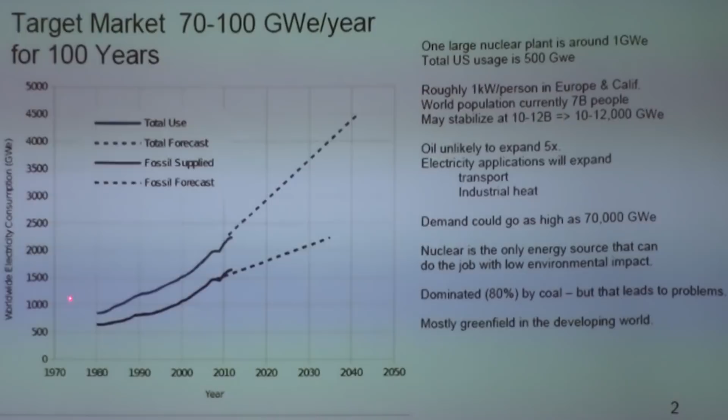Here, this is gigawatts electric. One large nuclear power plant is roughly a unit of 1, so this is roughly equivalent to how many large nuclear power plants do we need? In Europe and the US, we use about 1 kilowatt per person. In Europe and California, US is a bit higher as a whole. With reasonable efficiency gains, we should be thinking along the lines of 1 kilowatt per person.

Our current population is 7 billion. It's probably going to grow to the neighborhood of 10 billion before economies grow big enough that population stabilizes. So we're looking at a market of about 10,000 gigawatts electric.

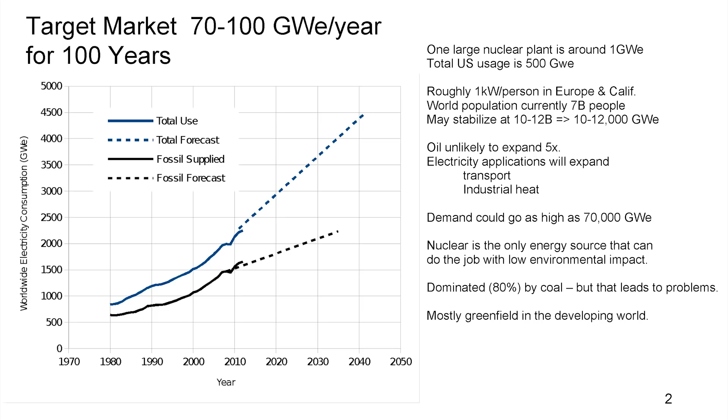But it could be larger because while we may not be at peak oil, we keep looking harder and keep finding more, but I don't think anybody honestly expects we're going to find 5 times as much oil as we have. So transport is going to shift, likely towards electricity. That's going to drive up our demand for total generation needed. Similarly with industrial heat. So there's a lot of reasons to suspect that 10,000 gigawatts is still a pretty low-ball estimate, and we might be looking at maybe as high as 70,000 gigawatts electric.

This is a huge market, the size of the whole oil industry today. If you look around at what could possibly supply this kind of energy, nuclear is the answer. The others simply can't meet that demand. But if we don't change the price of nuclear, we're going to be dominated by coal, and you're going to see 10 times as much coal as we have today. That's what's going to happen unless we can create a nuclear option that's cheaper.

The good news is that most of this nuclear is going into greenfield deployments—to people in the world who don't have electricity yet. So we've got a level playing field of brand new coal versus brand new nuclear. That's a lot easier battle to win than telling an existing coal plant to shut down and replacing it with a nuclear plant. That's a hard economic argument to win.

To successfully compete against coal, we need something that can scale up to very high volume, on the order of 100 gigawatts per year installation. Not 2 or 3, but around 100 gigawatts per year, or you're not seriously competing with coal.

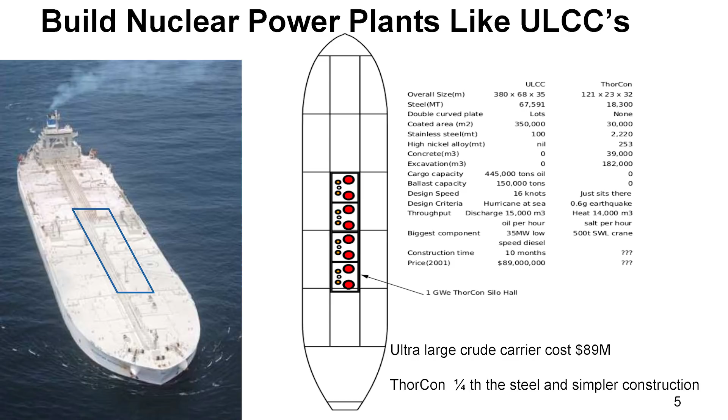So to go to more detail on the volume production end, this picture is of an ultra-large crude carrier, one of the world's largest ships. It was actually designed and built by the founder of our company. This blue box here is a 1 gigawatt power plant.

Drawn so that you can see it head on, this is a 1 gigawatt nuclear island of a power plant, not the turbines and generators and cooling towers, just the nuclear island. And it's small compared to the boat, like 1/4 of the steel. Similarly for virtually all the other numbers here, which are too much to go through, but it's simpler to build and 1/4 of the steel.

This boat cost $90 million. So if I can build a 1 gigawatt power plant for anything remotely resembling how much it cost to build that boat, that ship, then we're doing very much better than with current technology.

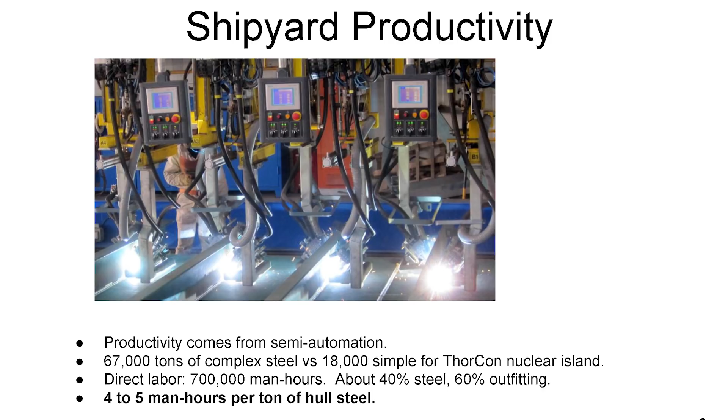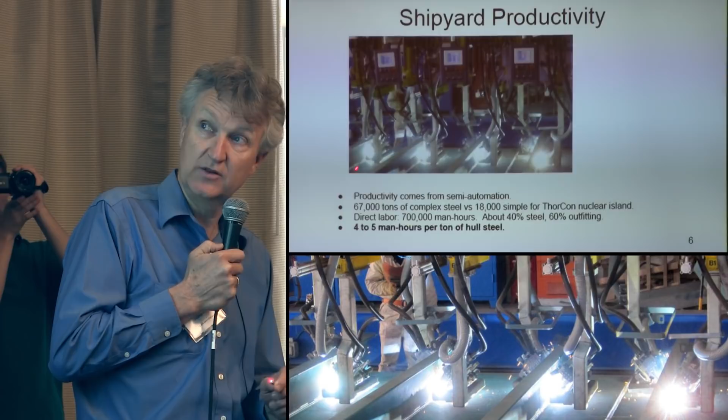The reason it costs so little for that boat compared to how big it is, is that they have shipyards that run things in production. This is for a double-hulled ship. You've got a plate of steel on the bottom, ribs going across, robot welders welding the ribs to the plate of steel, and one person running 5 or 6 different machines simultaneously. Then they flip it over and do the other side, making this double-hulled construction.

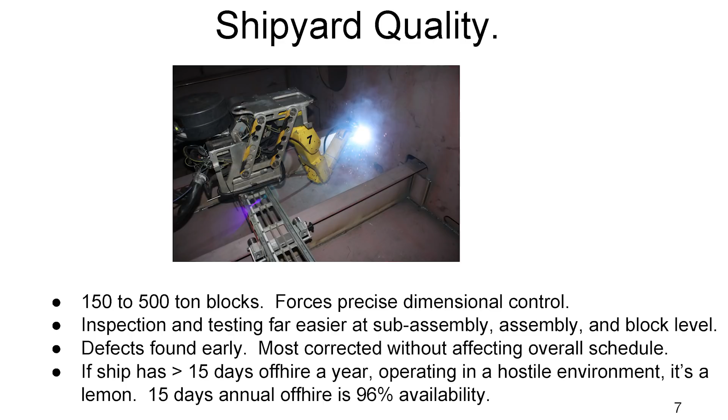We're building the power plants using the same basic technology, actually in the same yards. So our power plant is basically a boat dug into the ground with double-hull steel and concrete poured between the steel. One nice effect of that is you get very high quality control, a lot more uniformity, a lot tighter quality control.

We do these in blocks that are 150 to 500 tons, and the blocks have to align in the field very precisely, then they're welded together. We do the measurements, and they're quite accurate, having to compensate for how much 2-inch thick steel sags when it's set on end.

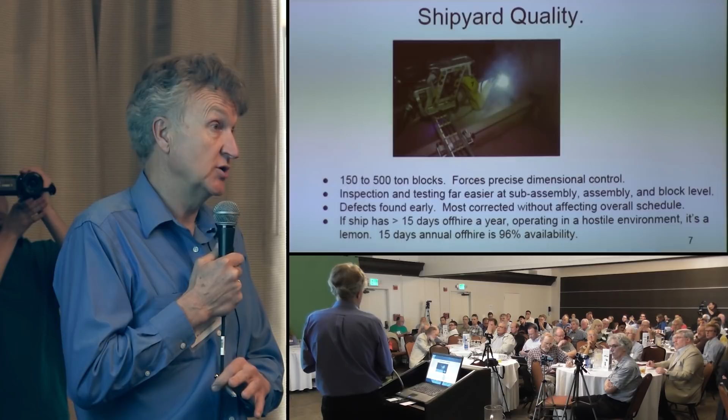We can do the full inspection on the production line, and if there are any defects, you can reject the block and do the modifications on the production line. You don't have to do this work in the field. So our goal is to get like 90% of the work done at the production line and leave only 10% for the field. A 1 gigawatt power plant is about 100 of these blocks.

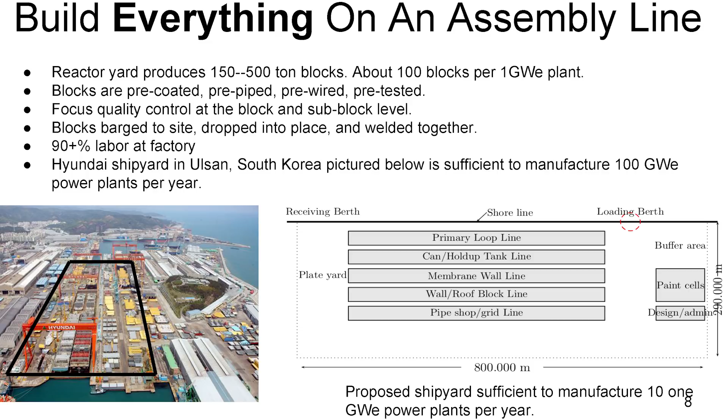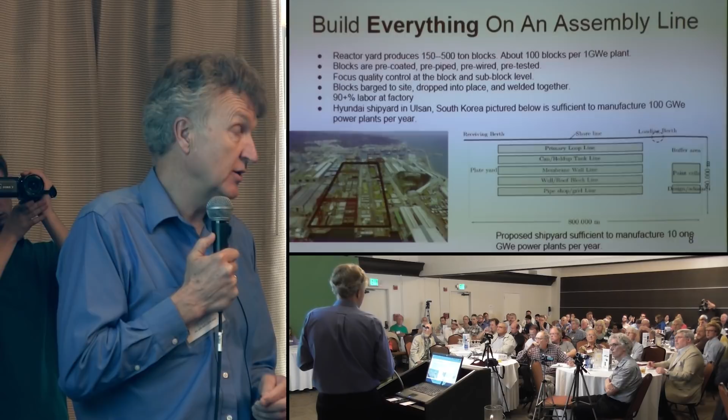They're pre-coated, pre-piped, pre-wired, everything finished in them, ready to basically plug like Lego blocks to the adjacent blocks. Once the blocks are all ready, in a normal ship they would be built in the dry dock at the shipyard. In our case, we're going to put them on a barge and carry them out to the nuclear power plant site.

This picture is of a shipyard in Korea, run by Hyundai, actually the world's largest shipyard. The highlighted area is what we would need to build a 10 gigawatt per year power plant factory. This gives you actual dimensions on it. If we took up this whole shipyard, we would be able to produce 100 gigawatts per year.

So the concept of being able to build power plants at 100 gigawatts per year is very, very much viable. And once we get away from the thick forgings of the reactor vessel that you have with light water reactors...

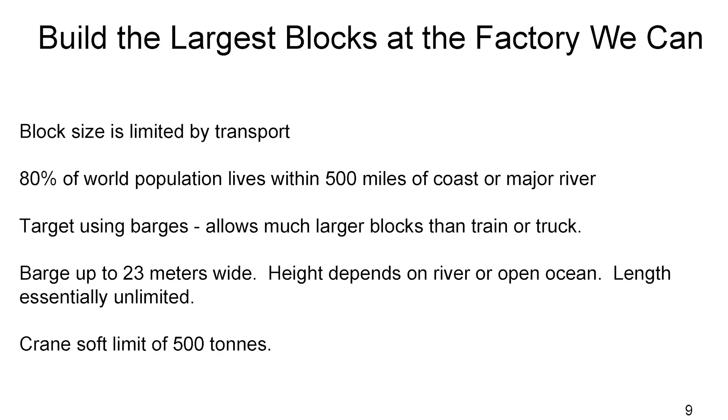The block size is limited by transport. We would love to build the whole power plant in one big block, but it gets to be a little awkward to carry around. What we notice is that about 80% of the world's population lives within 500 miles of a coast or a major river, so we're planning to use barges for transport, which makes it so we can transport these 500-ton blocks. They can be much larger than you can fit on a truck or a train.

That makes it so we can do more of the work at the factory, more of the inspections at the factory. The barges are up to 23 meters wide, which is set by a lot of the rivers and locks in the river systems.

500 tons is our current design limit, but that's set by crane sizes, and there are larger cranes, so we're going to be doing some economy trade-offs of whether we should go to larger blocks still or not.

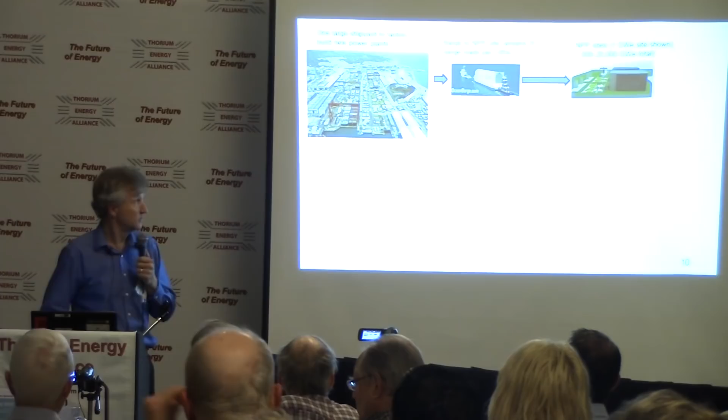So the concept is you have a factory that puts things onto a barge. It takes about 20 barge loads to deploy a 1 gigawatt power plant, so that's what this is.

Once you've done that, then every 4 years we exchange our cans, because we have a graphite moderated reactor, and so the graphite is going to get neutron damaged. We have to replace it.

We do that by having sealed cans that we put on a can ship, a specially designed ship, that will haul those back to a can recycling center, which basically looks like another shipyard that services about 50 gigawatts electric.

And we take the cans in, clean them, inspect them, make sure they're still good to go, ship them back out, or in some cases, like with the graphite, we take the old out and put the new in.

After we've been doing that for a decade or so, we're going to have some spent fuel, and that will go to a fuel recycling center.

We'll start out with just using simple fluorination and distillation to recover most of the salt. That'll let us recover the salt and the uranium and the thorium. It does not let us recover the transuranics.

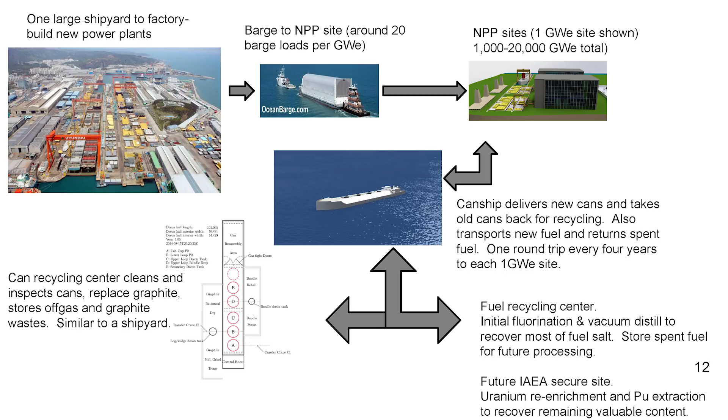In the future, we would anticipate making this a secure site and being able to do re-enrichment and transuranic extractions. Power plants are quite content to eat all of their own transuranics, so our waste flow as far as plutonium, curium and americium is set by how much leaks through your chemical extraction process.

We have to be safe. This is a 1 gigawatt power plant site. You see the can ship here.

This little red one is a can, that's a 250 megawatt electric reactor. We have a crane that moves along on rails, a gantry crane that picks it up and takes it over. These yellow hatches here are the doors to our reactor.

Our reactor is completely underground, and you access it directly from above. You take off the trap door and then you lower the reactor down into it.

These closed towers here are the decay heat cooling towers. So we have fully passive decay heat removal.

And then this is a standard turbine generator. We use standard steam cycle turbine generators until other people spend the money to invent the Brayton cycles. We have no objection to Brayton cycle, but we don't want to wait. I can buy the steam cycles today, and I want now.

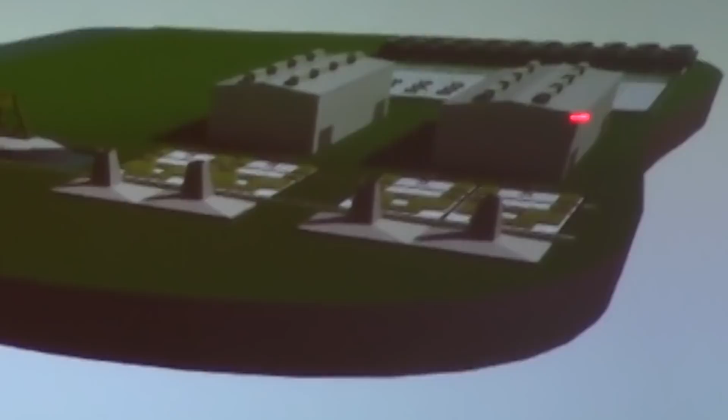Then behind that is a switch yard and forced draft cooling. But I'm sure we're going to end up having to support several different cooling styles depending on the site.

They make them larger, but they don't get any cheaper per megawatt, so we get better modularity by going about 600. They make them smaller, but they get more expensive. So we're sticking around the 600 megawatt.

We have 250 megawatt blocks, so it takes 2 of those to drive it, and these little red lines here are the steam lines that are going off to the turbine generator building. The nuclear island itself is 250 megawatts.

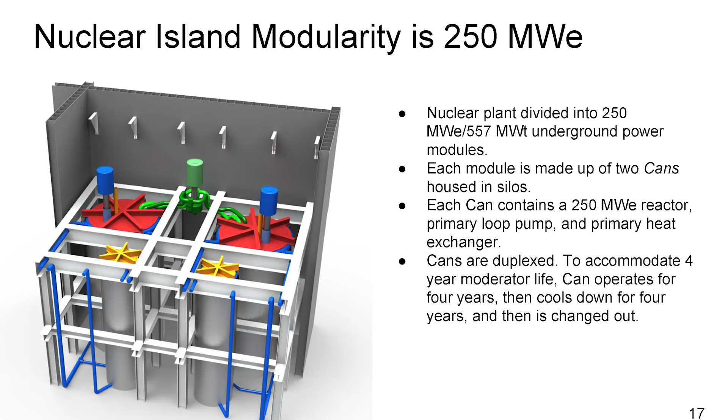We have 2 cans, so we're duplexed. One can is operating while the other can has spent fuel in it and is cooling down, letting things cool down before we transport it over the ocean. So what we're transporting is on the order of 4 years old.

Each can contains the primary loop pump, the primary heat exchanger, and the reactor vessel itself. So all of our radioactivity is really contained within the can.

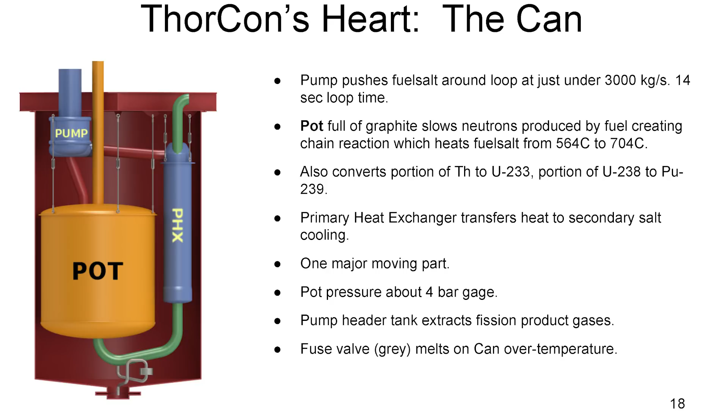We ship a sealed can out, we take a sealed can back. Inside the can, you've got the reactor vessel called the pot. We've got the pump and the primary heat exchanger, and those go around in a loop. You get secondary salt coming in and going out. And we have the fuse valve here at the bottom, and this will go off to a fuel dump tank, which we'll talk about in a minute.

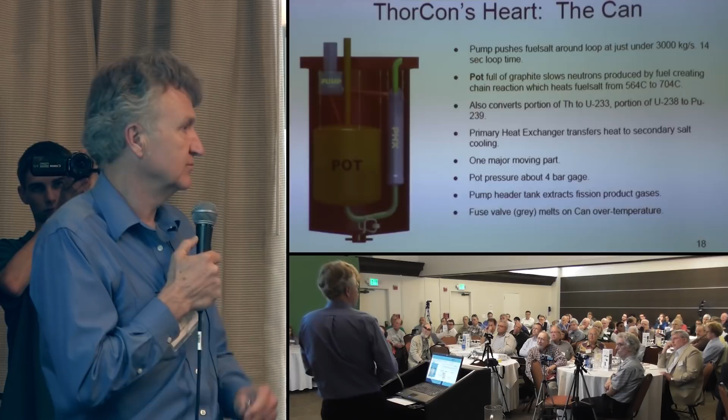Everything is hung from the ceiling of the can to accommodate thermal expansion. That turns out to be a reasonably challenging engineering problem—how do you deal with how things change shape as they go from room temperature up to 700 C? So we've done that by hanging everything from the roof and letting the cables adjust to let the parts move apart from each other and squeeze together with temperature.

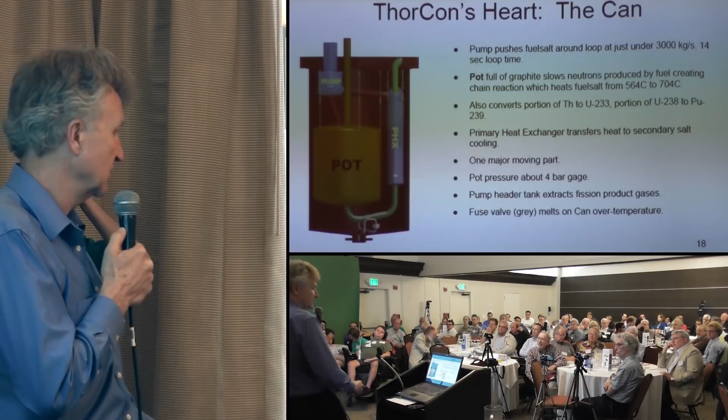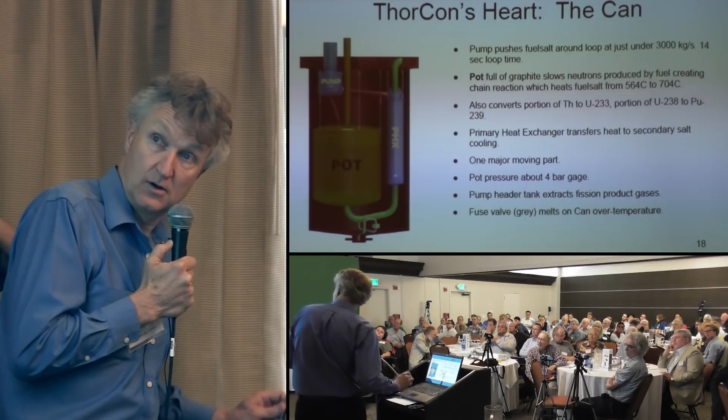The pump is moving about 1 cubic meter, about 3,000 kilograms per second, and it takes about 14 seconds to go around the loop. You only have one major moving part, the impeller for the pump, and the pressure is modest. The pot itself is around 4 atmospheres, and the highest pressure in the loop is 12 atmospheres. So we're dealing with very modest pressures here.

At the bottom, below the can, we have what we call a fuel dump tank—it's just the green part, a donut-shaped vessel that will hold all the fuel salt. Because it's donut-shaped, it's very poor for neutronics. Since we can move the fuel, we move it there, and it's in exactly the wrong shape for good neutronics. So the reactivity down there is very low. If gravity works and anything overheats, it will cause something to melt—preferably the fuse valve, but if that fails, a pipe will melt, and the fuel salt will fall down into this donut where it is not going to fission.

Guaranteed. No chance, no discussion about possible recriticality. That just isn't possible to happen.

I should say also that the fuse valve and the emergency drain here is something the operator can't prevent. If the Prime Minister calls and says, no, you're not allowed to open the valve, the operator just says, I can't stop it. There's no valve he can possibly fail to open, and no valve he can accidentally leave closed and cause trouble with, like we had with Three Mile Island. So the safety here is not operator dependent or Prime Minister dependent.

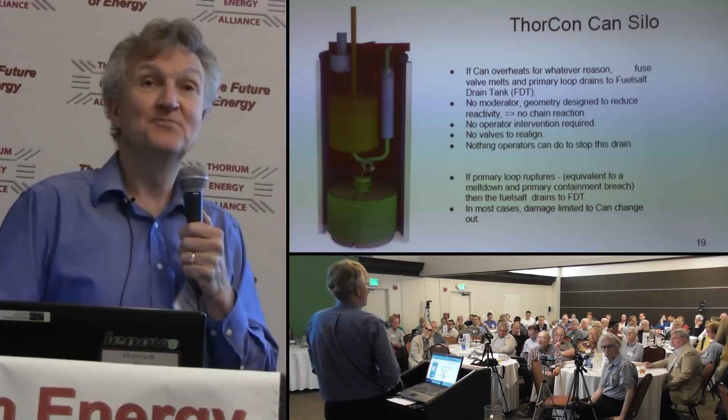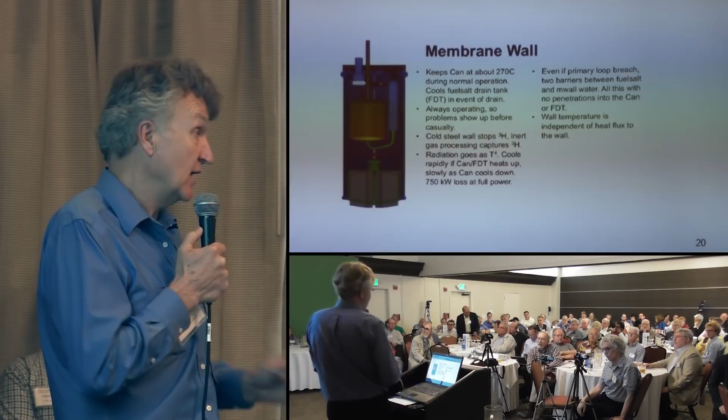Likewise, if you get down to the fuel dump tank, if heat is generated down here, it'll pump up from here. So the decay heat removal is there all the time, operating all the time. If something should happen—say an earthquake squeezed a pipe and blocked it—we will know because we see it in the flow during normal operation. We don't have to wait for a tsunami to hit to discover we have a problem. So we have it continuously tested, continuously running, and the operator has no valve, nothing he can do to stop it.

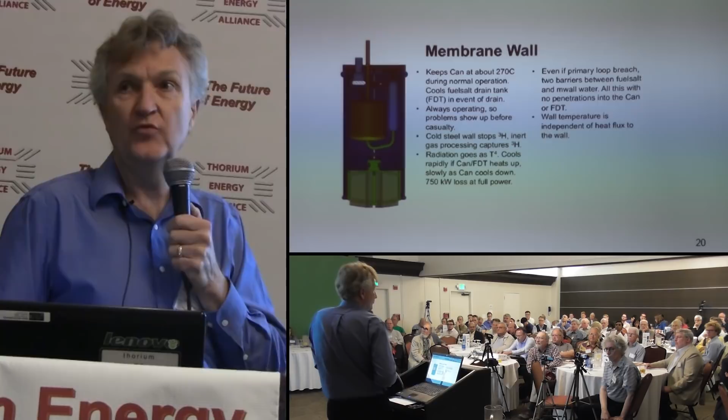It also doesn't penetrate any of the radioactivity area—this is done purely by radiation, no bayonets or anything probing down into the fuel dump tank. We've tested this in software up to 30 megawatts of decay heat power, and the peak decay heat we actually see is 5 megawatts, so we have a lot of margin on that.

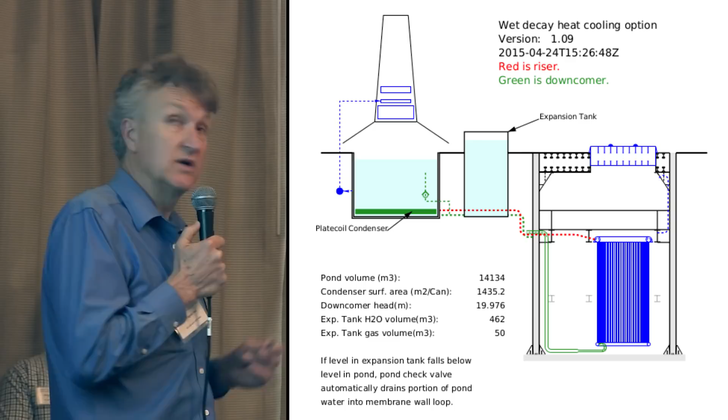Once we get the heat into the water of the membrane wall, we have to get it further away because there's only so much water there. So the hot water travels over to a pond. The pond evaporates and goes up to a steel cone above it, a chimney, which is air cooled, and the water condenses there and falls back down again. That should give us a nearly infinite supply of decay heat removal. If for some reason you're not allowed to put a chimney up, it's still 72 days worth. So we have plenty of decay heat removal, and since this is atmospheric pressure water, it's very easy to replenish if needed.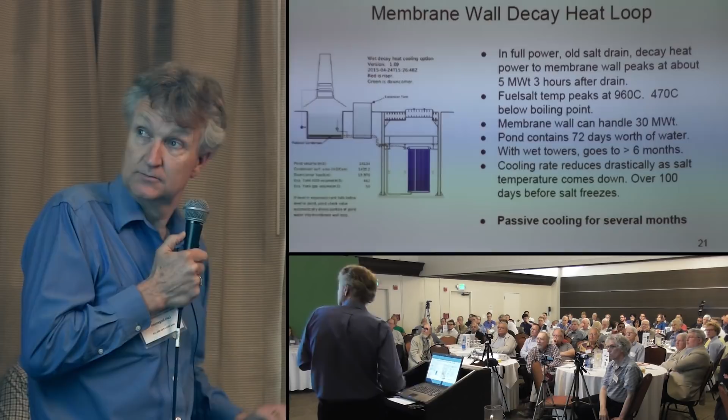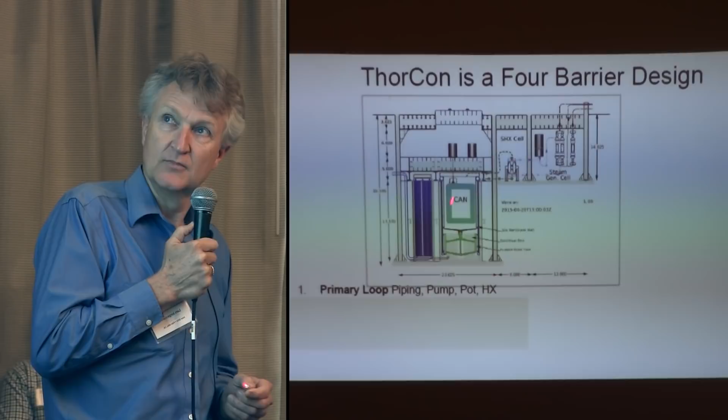Besides decay removal, we have multiple barriers to release of the radiation. The radiation is inside a primary loop, the pump, the pot, the pipe, so it's inside here. That is all inside of the can and the fuel drain tank, so that's the second barrier.

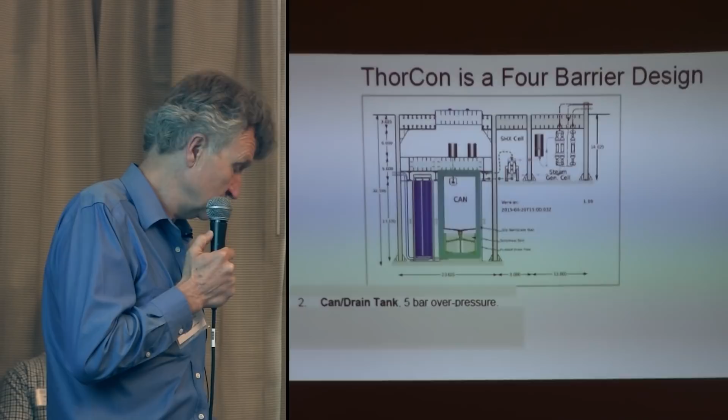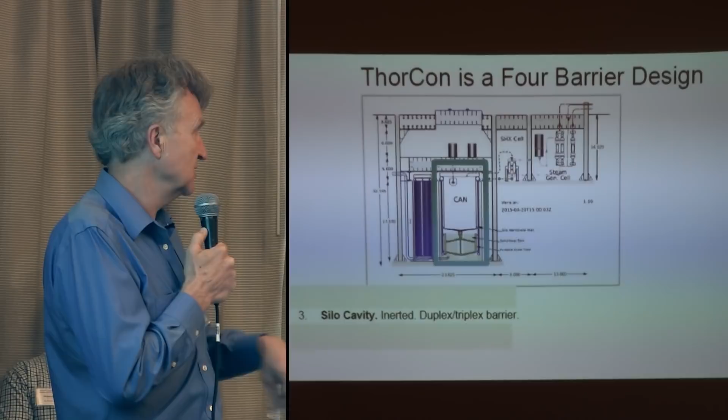The can and drain tank is in something we call a silo, which is a concrete structure, basically a concrete steel cylinder that's also gas tight. And then that whole thing is inside of what we call the silo hall, which includes the motors and the hatch to the outside world. So this is where you finally get to the outside world, and this is all ground underneath.

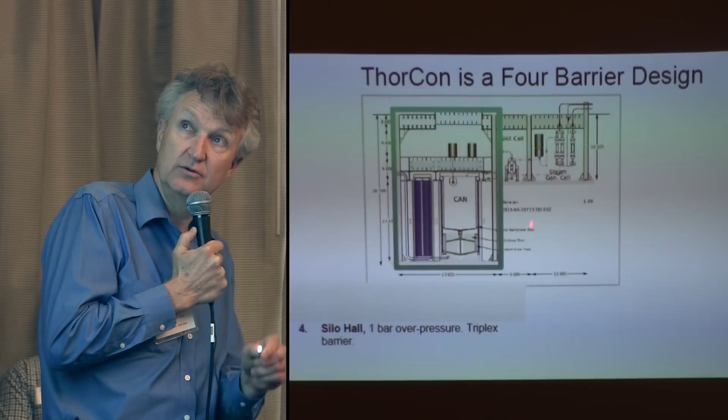So we have 4 barriers to getting any kind of radioactive release, and at least 1 barrier between adjacent modules. So if you did have one module that goes out, it's very unlikely to contaminate the adjacent modules.

We actually, in many ways, have a 5th barrier in that the fluoride salt itself is a very good barrier, in that the dangerous nuclides or elements would be your cesium, your strontium, and your iodine. The cesium and strontium form pretty tight fluorides that don't want to go anywhere. In fact, figuring out how to get the strontium out is a fair challenge. It doesn't even boil until like 2500 C or something ridiculous.

So even if somebody sent, say, a bunker buster missile in and went blasting through all of the barriers, you create a spill, it's a spilled salt that solidifies on the floor. It's not something that wants to go into the atmosphere in the first place.

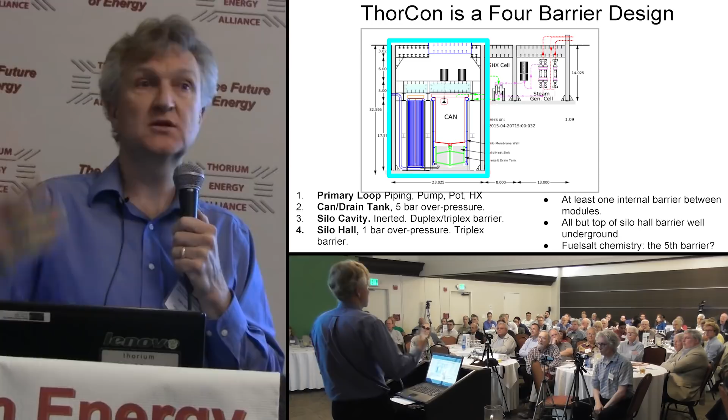Just a quick word on the neutronics, I'll keep this real short. The core is made up of logs. The logs are made up of planks, and all of that is graphite. If you're familiar with the Ebasco design, that was a spin-off from MSRE when they were looking at MSBR, it's based on that. We've made an accurate 3D model of the pot and run that both through MCNP and Serpent and get consistent results through them.

So we're pretty confident on that. We've actually extended the model to include a fair portion of the power plant beyond the reactor vessel itself, so we can see what about radiolysis of the membrane wall water and other questions like that. We're able to handle fairly flexibly what kind of fuel and salt in the same reactor.

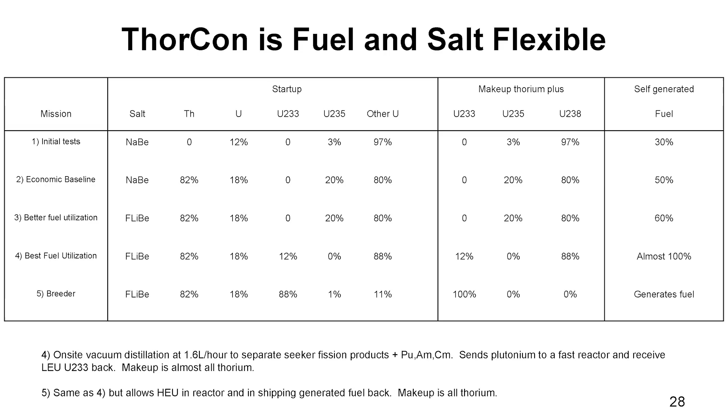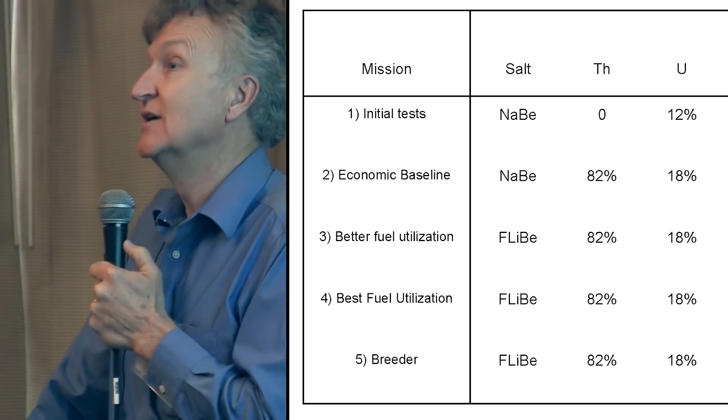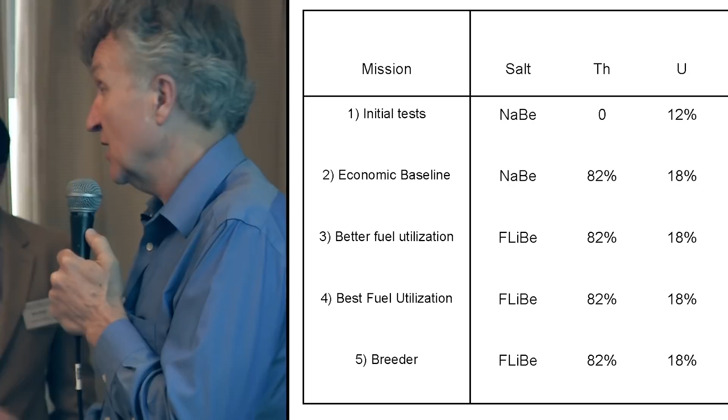We're currently planning on using NaBe, sodium fluoride, beryllium fluoride as our baseline salt because we can buy it now. FLiBe is a little harder to get by, and we don't want our schedule to be dependent on when we can buy FLiBe. So we make the economics work with NaBe. When FLiBe comes along, we can switch to it.

Likewise, what enrichment we can start with depends on time. So early on, we're thinking we might be stuck with 3% or 5% uranium, and then later on, we'll be able to switch up to 20% and get better efficiency, better economics. But it just changes the economics by less than a penny per kilowatt, so it's not a super critical thing.

I'm going to derail for a second and talk about should cost versus did cost. Should cost would be, if we set up a manufacturing line, how much does it take based on putting in the materials and the skills we have to put in, the labor we have to put in. Did cost is, and then what happened when you got in with all the regulations. So we're going to focus on what it should cost. The regulations are going to come in on a country by country basis, and it's going to preclude us from certain countries until they come to their senses.

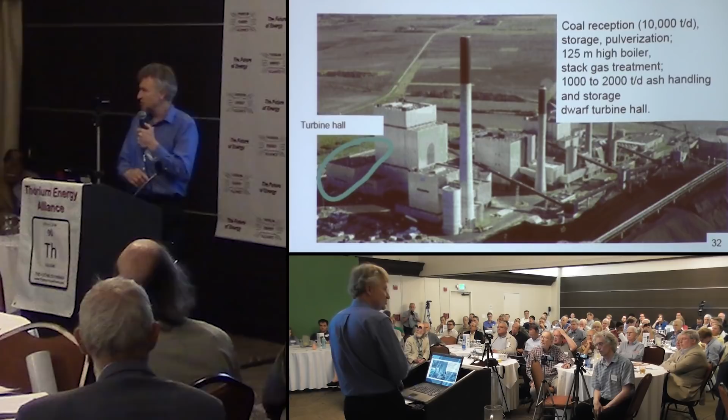And they've got the hard job. They've got the guys that are going to move 10,000 tons a day. They've got the guys that got 10 times as much building as we do. We should be able to beat them, and we can.

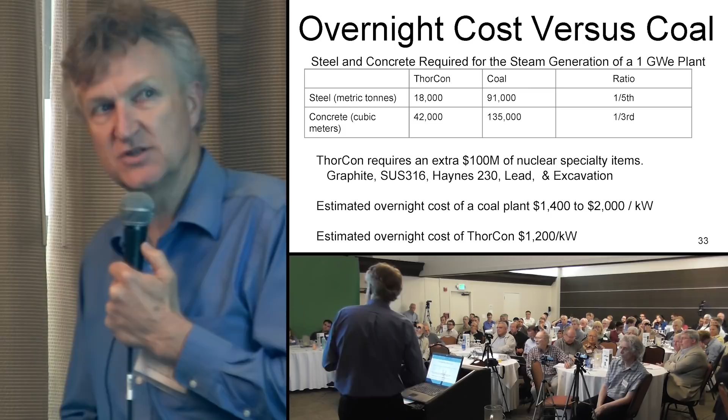So on steel, we got roughly 1/5 the amount of steel as a coal plant does. For concrete, we've got about 1/3 the concrete that the coal plant does. So our materials cost should definitely be significantly lower. We do have some exotic materials, so that adds up to about $100 million per gigawatt.

So if we get to the levelized costs, I can go through all the details here, but bottom line, talking about roughly 6 cents a kilowatt hour for coal and about 3 cents a kilowatt hour for ThorCon. It's roughly where we think we're at.

The other thing we think is important is if you're going to have 10,000 units deployed, inevitably some of them are going to break. We can't say why or where, but something's going to break someplace, sometime. We want to be sure that's not a significant event. So all the modules are replaceable, and you have hatches on top that let you come in, take the module out, and put a new one in.

That's quite different from existing light water power plants, where they have to deal with very large pressures and a large inventory of water that could turn to steam and has to be contained. Because then you have to cut through the concrete mausoleum to try to get in there and fix things, and that can be quite expensive and has actually ruined some power plants.

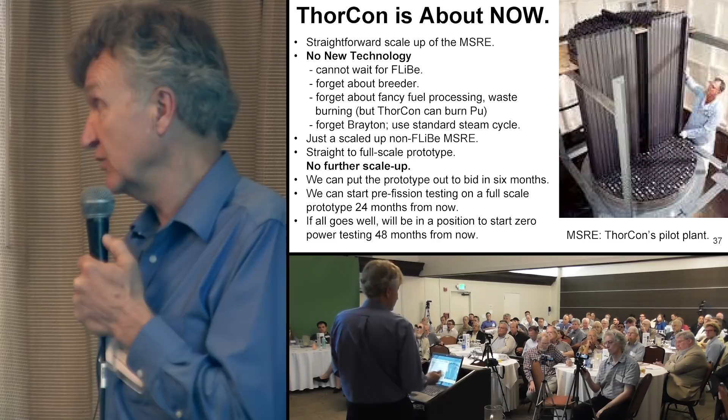Finally, it's about getting it ready now. So we started with MSRE, and we've made sacrifices in neutronics performance, and somewhat in economics, in order to keep the schedule short. We're not depending on when we can get lithium-7 — we're saying we can do just fine with NaBe. We're not depending on when we can process the plutonium, extract it, and recycle it — that'll wait for us. We have some spent fuel, we'll stick it in the corner, and when the process is ready, we can go back and clean it up. It's not going anywhere. We're not going with the Brayton cycle because it's not here now. We can go buy steam power plants and compete with coal now.

We do plan to build a full-scale prototype. Our prototype will be 250 megawatts electric. Once we've tested it and abused it, put it through all accident scenarios, we can tell people in the city: no danger is going to happen, because we've tested it. We've actually done it. We'll ruin a power plant in the process of that testing, but we'll be able to give people that reassurance, that safety.

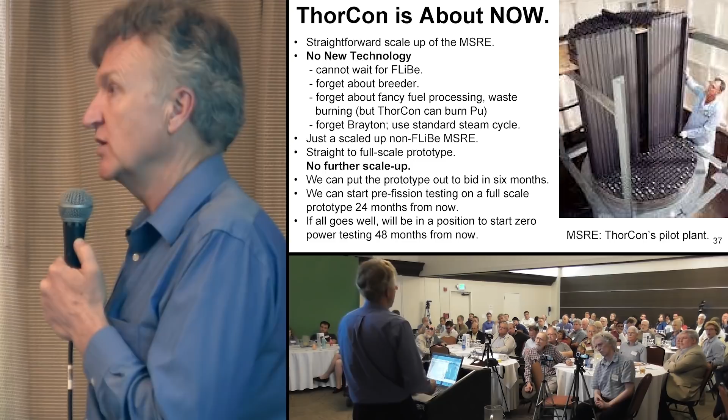We think we can get to pre-fission testing in about 2 years, and to fission testing in about 4 years, based on the speed of technology and how fast we can get the work done. Now, if the regulation system is slower than us, that will extend the period. In some countries we think we could just add 1 year to that schedule and work there. The other factor is finance, which I don't have answers for right now.

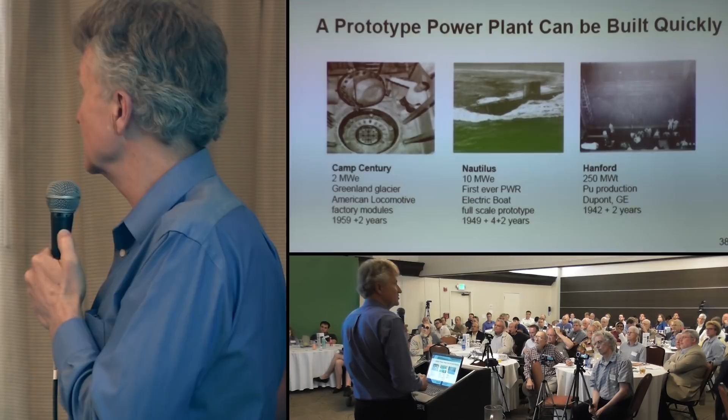That kind of schedule seems crazy to people used to the nuclear industry, but I'd point out that Camp Century was built in 2 years. The Nautilus was built in 6, and that was the very first one, with lots of extra challenges being a submarine. Hanford was built in 2 years. By those standards, ours is a rather lax schedule.

Your construction costs are $1 per watt, correct? Yes. What is a typical power plant right now? For nuclear power, about $8 a watt in the US, and $6 a watt in the UAE, something like that. 5 or 6 in China.

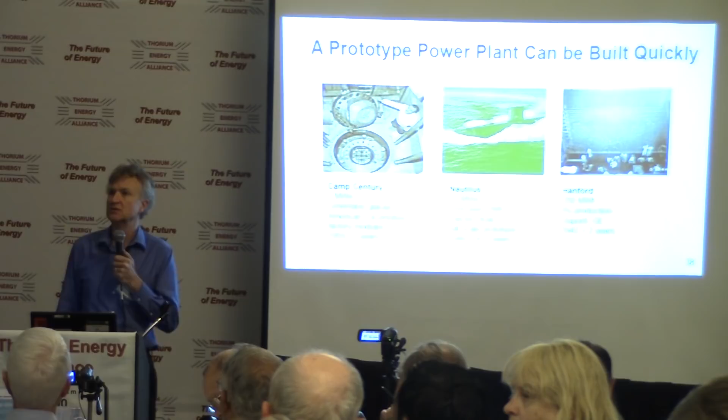With that $8 in the US, is that a lot to do with regulation — a very significant cost? A third of it is attributable to regulatory costs. So the question is, is the $8 in the US based on regulation, and the answer is partially. Partially it's the fact that it's a light water reactor, so most of the construction happens on site, and you don't get the benefits of an assembly line. Partially it's the very thick concrete structures and lots of rebar, which is expensive to build.

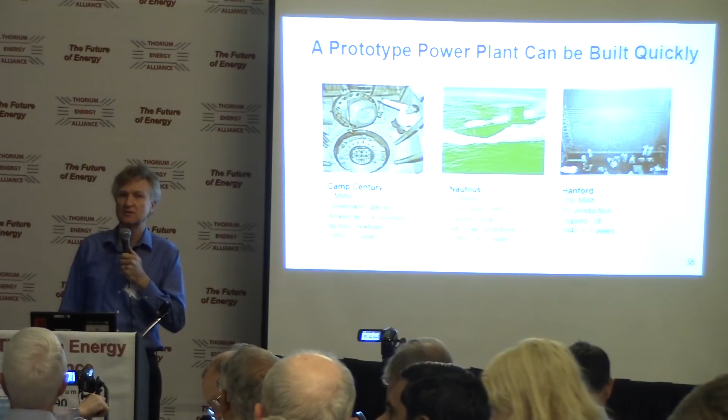How big is your team, and what's it going to take to reach your goals financially? Our team right now is about 6. We're looking at roughly 10 million for the initial design, to get through bids from subcontractors. Then about 100 million to get the pre-fission prototype built and tested, and about 700 million to get the fission prototype tested.

How did you make the decision between operating as a company that sells reactors to utilities versus one that owns reactors and sells power? I don't think we've made that decision, and I think that will probably be made by the guy who comes up with the $700 million check.